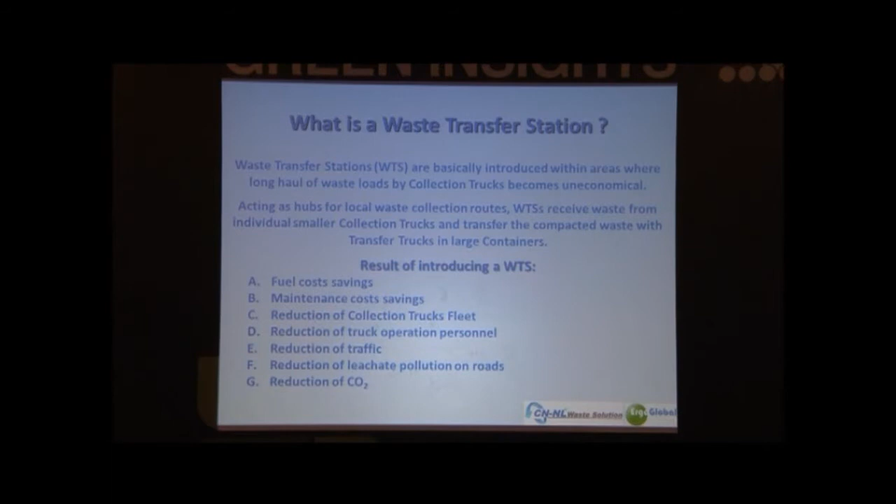Waste transfer stations have two different concepts. There's the horizontal, which is the most commonly used, especially in North America, but also Japan. And Japan introduced their horizontal transfer station in other countries. Now the horizontal transfer station has some problems.

This is not a big problem, but they occupy the space under the deck. This space here is occupied by the compactor and by the very heavy-duty hydraulic power unit. So this space cannot be used.

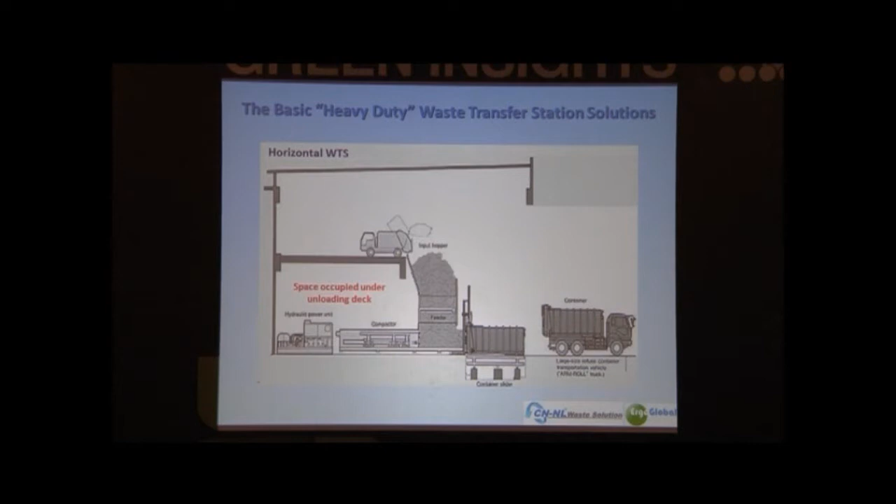Furthermore, it's high power required for the feeder and the compactor, and it cannot operate if there is a power failure. If there is a power failure, you cannot push with the compactor into the feeder and from the feeder into the container.

Then the waste will be exposed to air, which causes a lot of bad odor, a lot of air pollution. Then they can hardly contain the leachate in the area between the feeder and the container. That will always mostly leak, also during transportation.

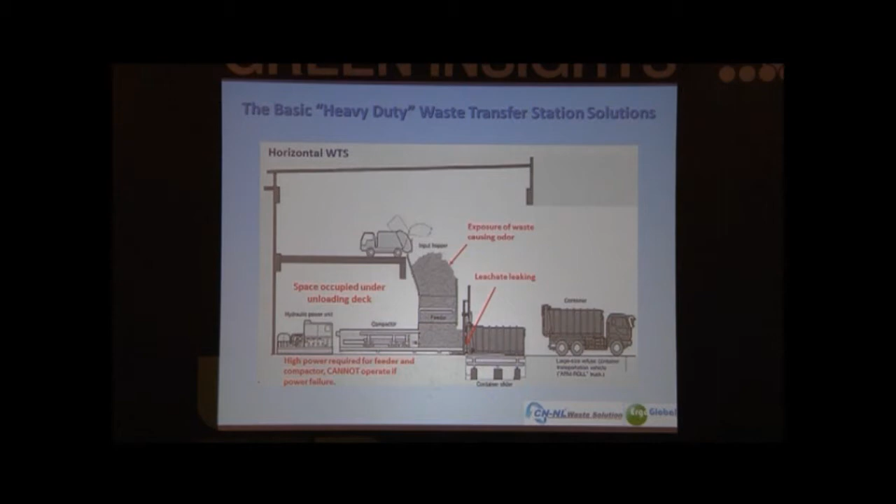Now, this was horizontal. This is our introduction of the vertical type. We move the compactor and the hydraulic power unit up here.

So the result is that we have this space available, and this could be available for waste sorting and material recovery or other facilities, for example workshops, storage, offices, etc. There's a lot of possibilities, also parking under the unloading deck.

Then we have a low power compactor because when we use it vertically, we have more power. We also use gravity, so we have natural compaction. In case we have a power outage, we can still operate because Mr. Newton is helping us with the gravity, so it can still operate.

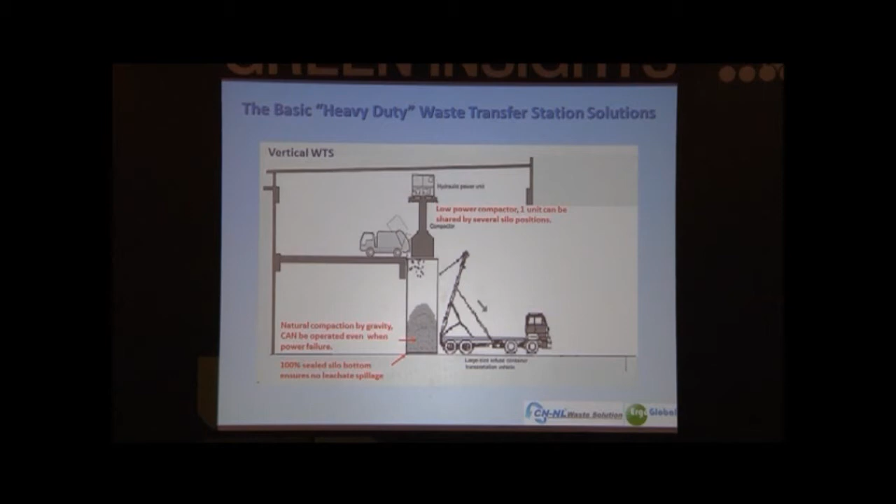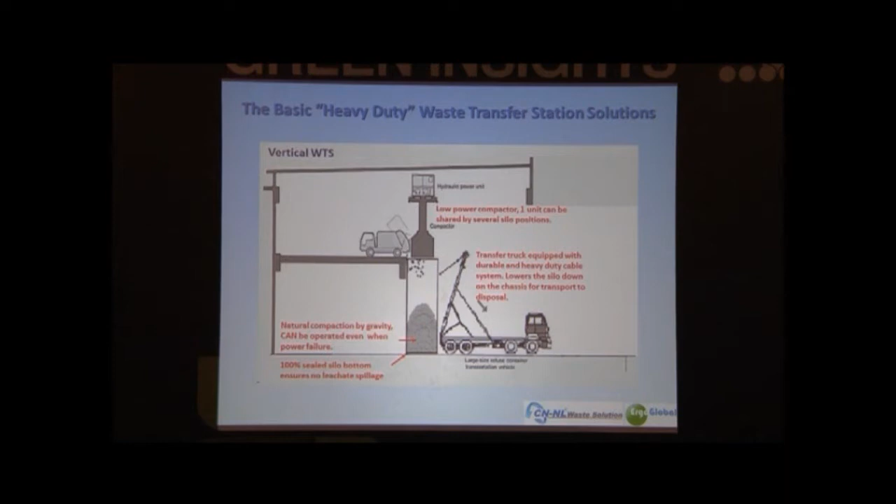Then we have a 100% sealed silo that ensures no leaking during the compaction and during the transport. Transfer trucks are equipped with a heavy-duty cable system that can take the silo from its position, lower it to the truck for transportation. So that's the difference between the horizontal and the vertical system.

We introduced the vertical system back in the 1980s in Europe, South America, and Australia. But now we have introduced a lot in China, and we have a station also in Penang, Malaysia, which I will show a little bit later.

There is a lot of difference between our vertical system and the common horizontal system. We store the silos vertically, which means there is a small footprint compared to the horizontal, which has to store them horizontally, leaving a larger footprint, and you need more area, and area is expensive.

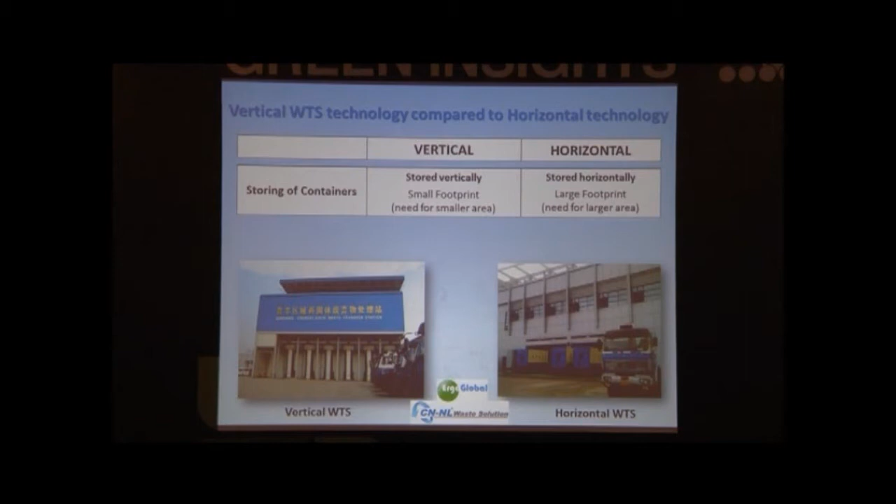Then the loading: we dump it directly in the silo, and the waste for the horizontal is first dumped into a storage tank in a feeder, and then after it's loaded into the container. We do it directly.

Power consumption: we have much less power consumption than the common horizontal transfer station. Equipment investment: we have less. It's a simple way of setting up a transfer station. So we have less equipment, and we can handle more silo positions with one compactor. We can handle up to six positions, where the horizontal usually has one or two.

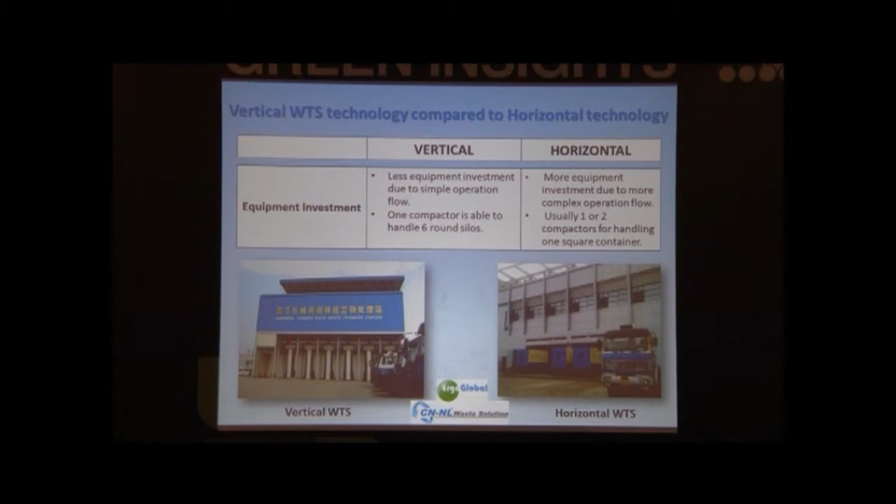The maintenance cost: because of that, the maintenance costs are lower than the horizontal. Odor pollution: since we dump directly, we can control the odor much better. And we also introduce in our transfer station an odor and dust control system, so that we don't have any bad smell from the area inside.

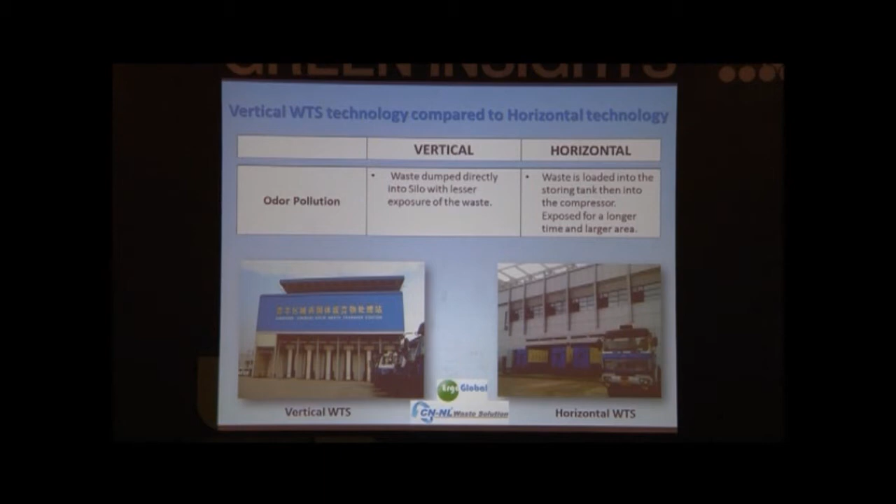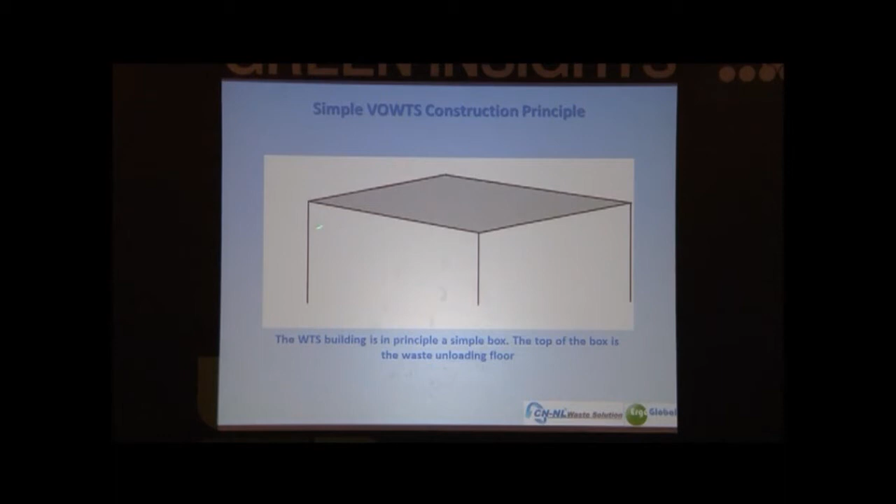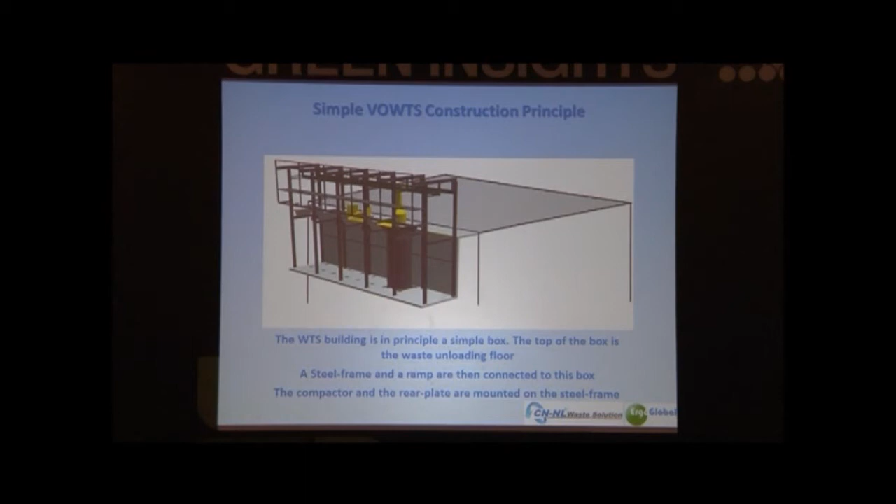We have a very simple construction principle when we construct the transfer station. It's basically a box. The lower floor is below here, the upper floor is there. So we introduce a steel frame, which we have designed, and then just introduce it to the box. After this has been installed, then we can install our compactor and our funnel system, the funnel system to make sure that the waste is dumped into the silo and not around the silo.

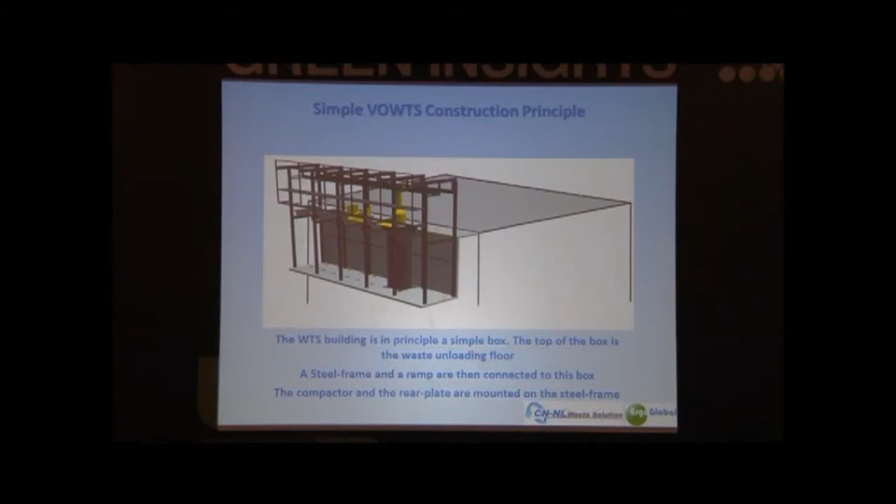The key components for our transfer station are the silos, and they are made of a special Swedish steel called Domex, with which we can make it very light. We only need 3 millimeters of the body.

And we don't need reinforcement, because when you compact into a square container, the forces will like to make the square container round. And therefore, to keep a square container from going round, you have to reinforce it so it stays square. So the Dutch, when they invented the system, said, why do it that way? Why don't we make it round to begin with? So we actually save a lot of steel, and we can have more waste payload in the transports.

Then we also have another option. We can actually take the leachate out from the silos. We can treat it on the transfer station, or we can transport it by special tankers from a storage. So you don't have to transport the leachate. This is sometimes a requirement from our customers, that we have to take out the leachate, and we have a few transfer stations in China where that has been made possible.

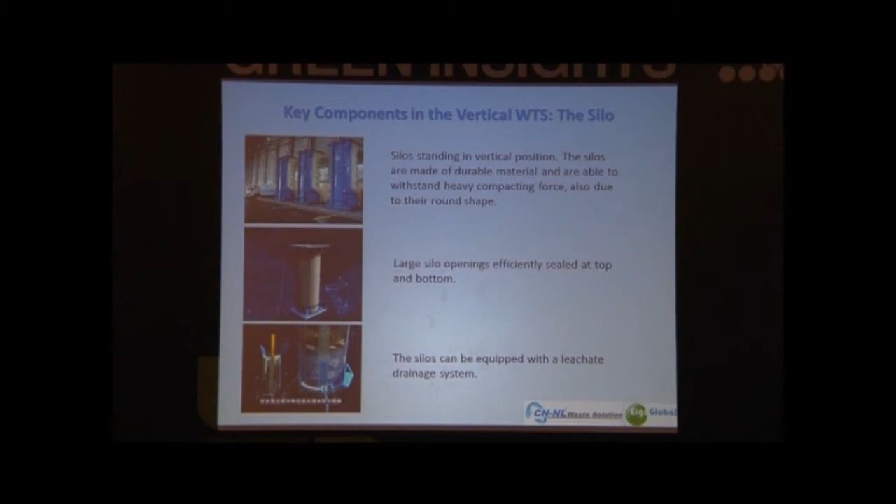The next key component is how you load the silos. I just said before that you need to make sure that the waste goes into the silo and not all around it. So we put a rear plate on the steel frame. The rear plate is shown in the downward position here, and then the steel frame includes these side plates, just to make a funnel to make sure that the waste goes into the silo.

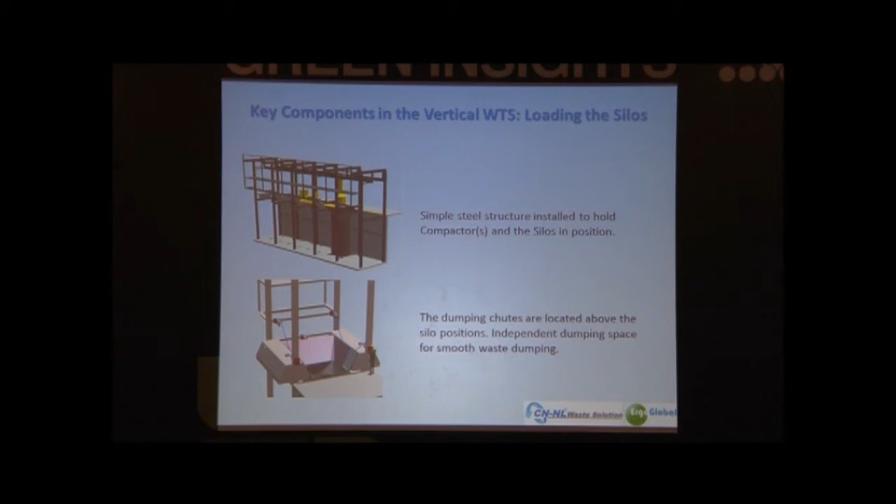The next one is the compactor, and I must just tell you that this is not how quick it works in reality. I couldn't make it slow on the presentation, but it works slow. It presses with 30 tons. It weighs about 7 tons itself. And the hydraulic power unit is mounted on the top of the compactor, so it's mounted up here. And then it's controlled by PLC. But it doesn't press as quick as this one.

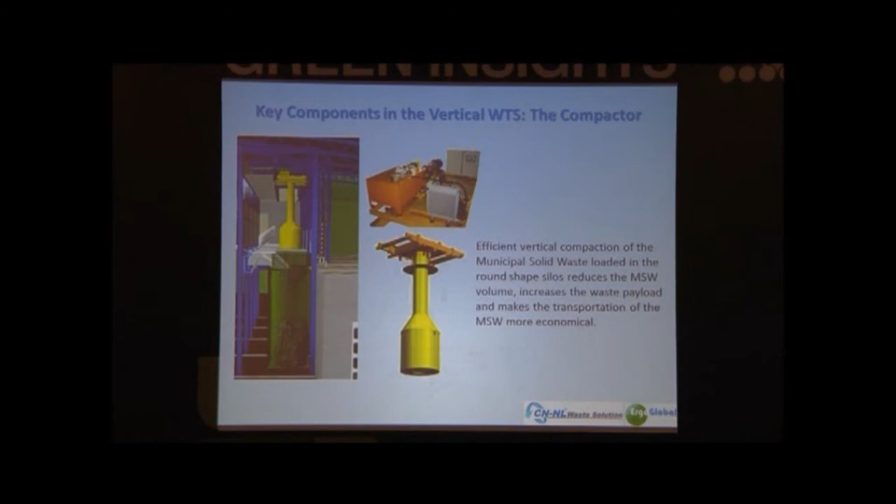The next one is the cable system, how we take the silos from the positions. We lower them by a special cable system, which we normally produce in China, and then mounted on a truck, which can be supplied by the customer. As long as we know the truck's chassis design, we can mount our cable system on most truck brands. In China, we mostly use a truck called Sinotruk, HOWO Sinotruk, but there are many brands.

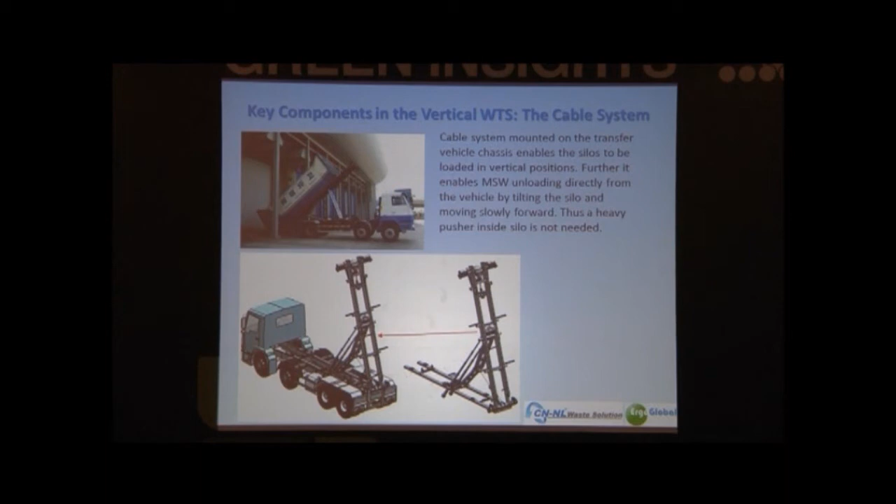We have different transportation methods. We transport in a 6-meter silo. We can also transport in a 7.5-meter silo. So these silos will take, depending on the composition of the waste, between 15 and 24 ton in the silos. We can use a semi-trailer, or we can use a double trailer.

The double trailer is used in Malaysia in our Penang transfer station project there. So we take two 6-meter silos from the transfer station to the landfill, and they take about 30 ton total in these. Again, it depends from country to country on the road regulations, but also, of course, on the waste composition. The very wet waste will be heavy, and the very dry waste will be lighter.

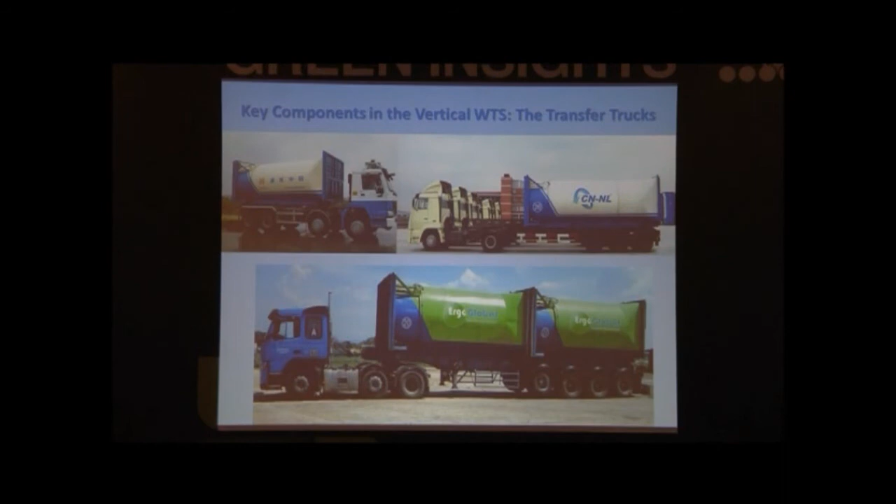Our business scope: we supply equipment, we do EPC, we do investment, BOT or DBOO, or we take over, upgrade, operate and transfer, and we operate the facilities. Now, a common way is that we do EPC. We go in, we install, we train, we commission everything, and then we have the customer operate for a period of time, and then we suggest that we buy back so that we can operate. This is a way we have done in China, and we're now doing in Malaysia in Penang too.

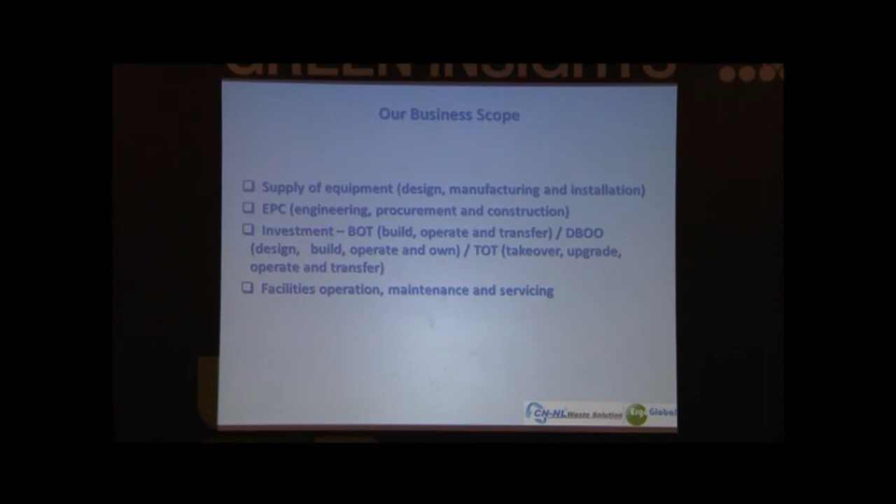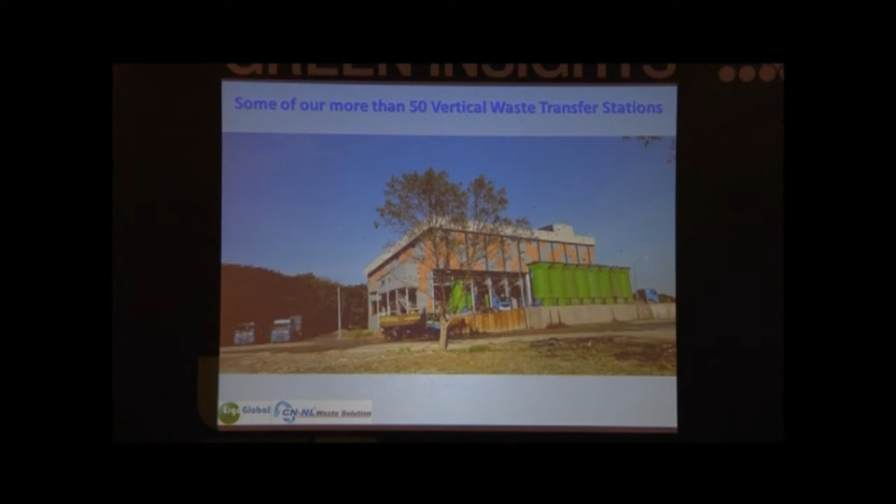Then I'll show you a few of our transfer stations. This is our transfer station in Penang, in Malaysia. This is our first transfer station in China, located on Chongming Island, just north of Shanghai. That station was more a showcase, so that we could show people in the local governments in China how it works. Because, I mean, we said to see is to believe. So why not build it and show how it works?

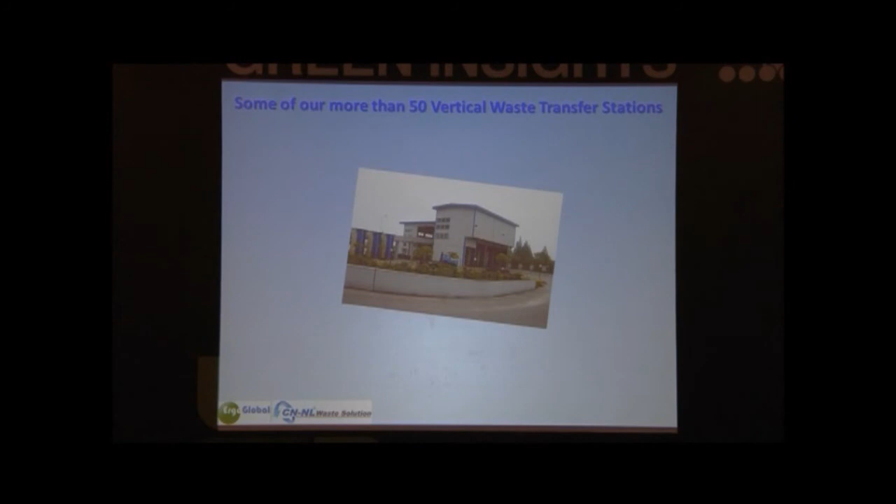That was built in 2002, and then a lot have followed in the latest 12 years. We have now more than 50 transfer stations in China alone. This is another transfer station in Pudong, also in Shanghai. This has the capacity of 1,200 ton, and our booth has a model of this transfer station.

This is a special type of transfer station. The local district government wanted to have a very, very nice transfer station covered with a park, so that the residents could agree that they had a transfer station in the middle of their residential area. Of course, that led to a lot of requirements for the dust and odor control especially, and also for the entrance of the collection trucks.

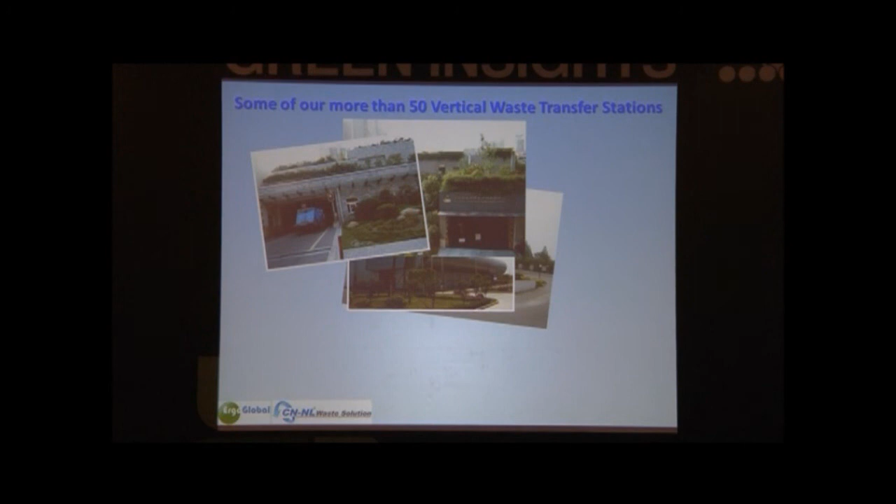I hope that you will have the opportunity someday to come to Shanghai and see our transfer stations there. This one was actually exhibited at the World Expo in 2010, and has been recognized a lot. Another garden type transfer station is also in Shanghai, in Huangpu district.

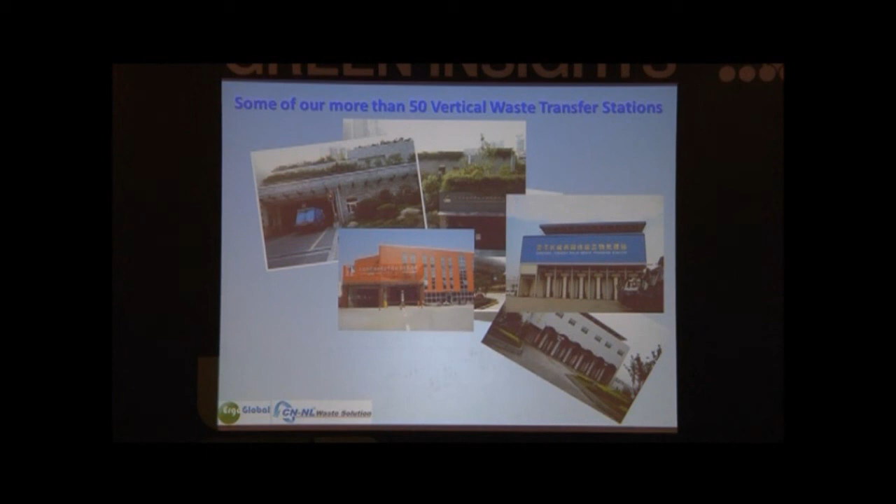Then I'll just show a few concepts of the transfer stations. There's a possibility of a lot of different designs, and normally we leave it up to the customer, of course, to choose whatever design the customer finds most appropriate. So they can, of course, range very much in prices. So I'll just show the pictures a little bit.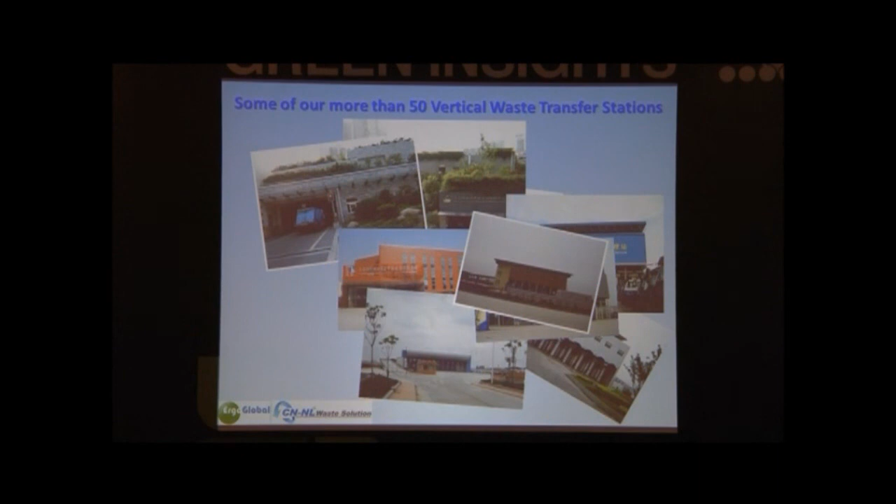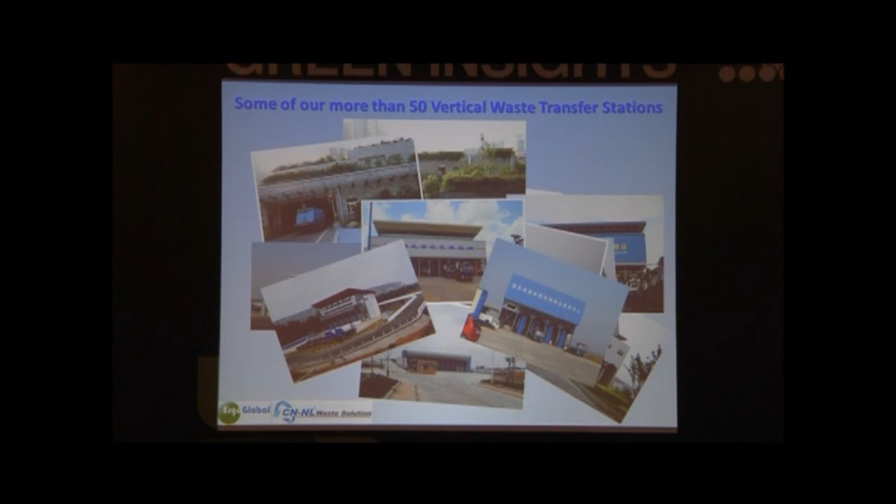Okay. So is there any possibility of removing the leachate before transportation to the dumping site? Yes, like I showed on one of the pictures, maybe too short, we can take the leachate out of the silos before transportation. We have a special pumping system that can connect to the silo and pump it out. Then the leachate can be treated either on the spot, at the transfer station, or be transported by special equipment to a leachate treatment plant. We can do that.